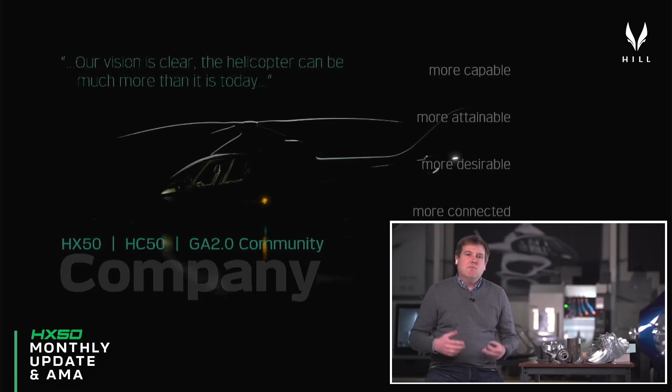So without further ado, let's talk a little bit about the company. For those joining this evening for the first time, Hill Helicopters is all about the idea that the helicopter can be much more than it currently is today - more capable, more attainable, more desirable, more connected, and more owner-centric. We're creating a whole community, a whole ecosystem for owners, users, and operators to own and operate and share the joy of owning a helicopter better than ever before.

To that end, it should be no surprise that what we're doing is connecting very well with the user base, and we're now up to 484 combined sales, with 399 HX50s and 85 HC50s going out around the world. We're absolutely delighted with the warm receipt we've received from the market for both products. We're very, very grateful for that and the support that we're getting.

To service this growing demand for aircraft and to really push the development forward and bring the aircraft to market on schedule, as you can imagine, we're having to grow the team and grow the facilities very quickly to keep up with all of this.

So I announced, I think last month, that we'd been advertising for 8 posts. We've now essentially filled all of those. We've got 3 new engine specialists starting with us: a performance modelling specialist, a jet engines or gas turbine engine stress specialist, and an aerothermal specialist, along with a new machining specialist that focuses on blade and blisk components.

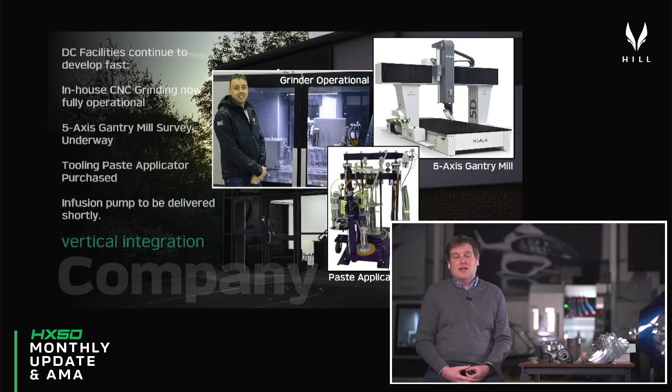The first half of the acoustic trials have now been completed, and we're just waiting for the last of this crazy weather we've been having in the UK to clear, so we can do the flying part and do the source surveys for the helicopter noise. So we'll have an update on that very shortly for you, but very pleased with how the facilities are keeping pace with the needs of the program.

So if we talk now briefly about the drivetrain, let's start with the engine this week. Essentially, we're now very, very close to a total design freeze on the engine. So what you will be aware of is we've, over the course of the last 3 to 4 months, switched to a much smaller, lighter, easier to build and easier to maintain version of the GT50 engine that features this compact diffuser and an annular combustor.

The design of that is now nicely mature, and with the exception of the last couple of parts, we're essentially ready to launch a full-scale stress and lifing and optimization effort on that to allow those components to be released for formal prototype manufacture on the equipment that you can see right behind me. The performance, the weight, and the cost of the GT50 are absolutely bang on target. So we're absolutely delighted with how the team have progressed that for us.

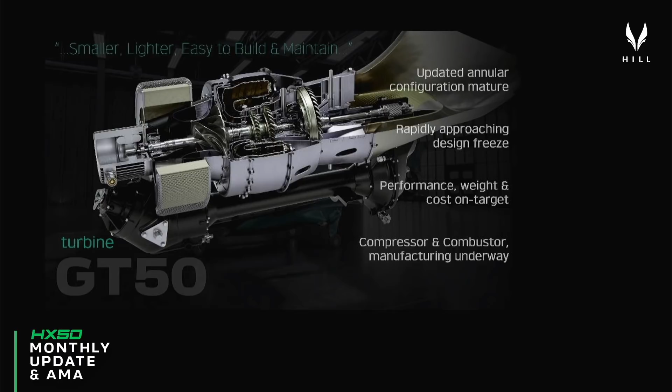The compressor and the combustor manufacturing trials are already underway. So as we've showed you on a number of occasions, we've completed the first manufacturing trials on the centrifugal compressor. This is the 10-bladed version that we did. We're currently developing an updated version with its Curvic couplings and a reduced 9-blade, 9-splitter vane form factor. That's going to be cut in the next couple of weeks on the 5-axis right behind me. And we've also got the titanium on order to be able to produce the titanium version.

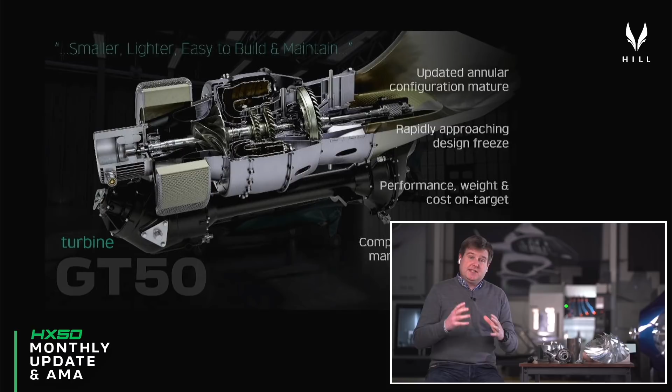I've got what's it in my ear? Sorry, just bear with me 1 second. I've got massive feedback in my ear.

So we'll also be producing the titanium version of the compressor very shortly as well, and that will then release that part of the engine to testing. So very, very pleased with how that's all coming along.

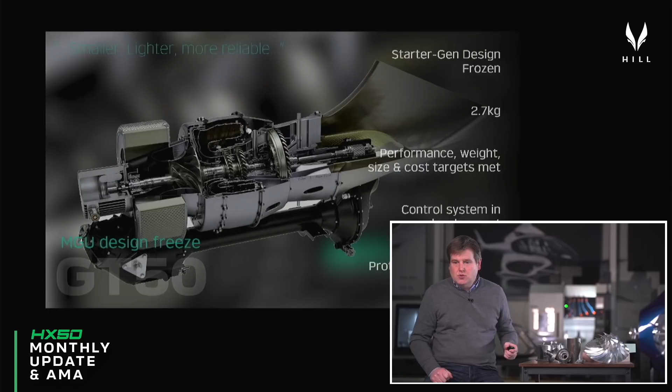Yesterday, we actually managed to freeze the design of the starter generator. So the starter generator on the GT50 engine is a directly driven, fully integrated system. And the reason that we've done that is to get a far more compact and a far lighter, simpler and more reliable starter generator configuration. We've now frozen the design for that. We are well below our weight target, so the whole starter generator unit has been designed for just 2.7 kilos, which is about half of what a typical one of these units for an engine of this size would weigh.

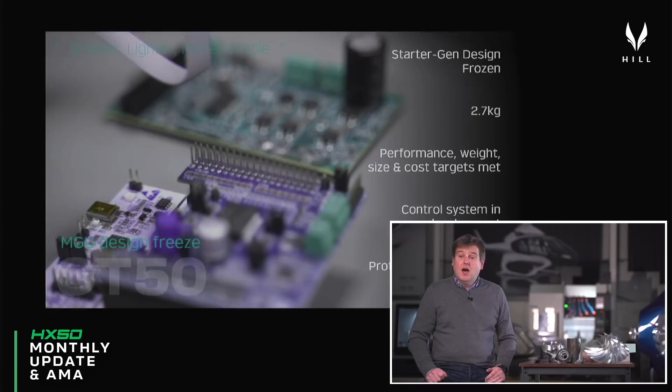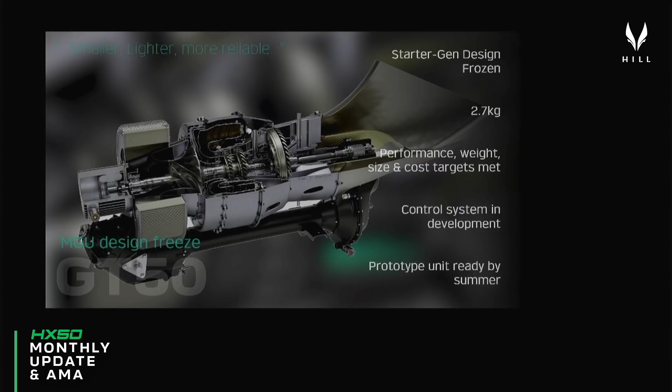Again, the performance, the weight, the size, the cost targets have all been met, so we're right on target for being able to deliver that exactly where we expected it to be. The starter motor really consists of 2 parts. We've got the hardware, which is the electromechanical device that generates the power, but there's also then the control system, which for a small high-speed device like this is a bit more complicated.

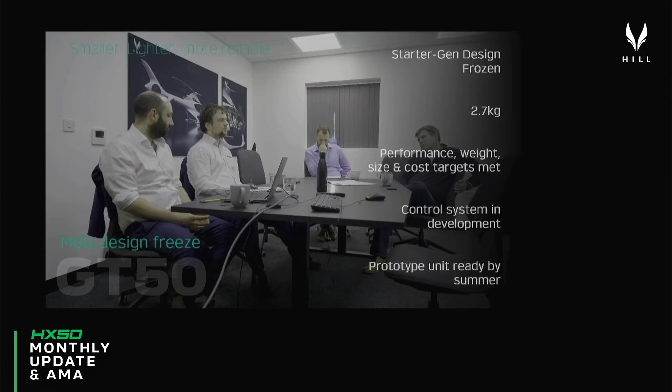We're currently looking at 2 alternatives for the control systems for the starter generator. The first one is something that we're developing in-house using a derivative of some motor control technology, and the other one is some off-the-shelf components that we're working with a third-party organization to develop. So all of that's coming along very nicely. The performance looks great, the price looks great, so really happy with how the starter generator's coming together for us.

So in terms of the overall engine program, what we've got to look at now is how we move from this nice mature design through to producing a prototype engine in the fastest time absolutely possible. And to do that, we've got essentially 3 major streams to the development program that are occurring all at the same time.

So while the aerothermal optimization and the detailed stress analysis that, to all intents and purposes, will only make very, very minor modifications to the geometry are taking place, we're busy producing all of the processes that we need to produce these parts on the machines behind me. So that includes the demonstration work that we've been doing on the compressor that I've already shown you. It shows the demonstration work on things like the speed reduction gearbox casing, the bearing work, the high-speed gears, and the nozzle guide vanes, and all of those things that we've introduced.

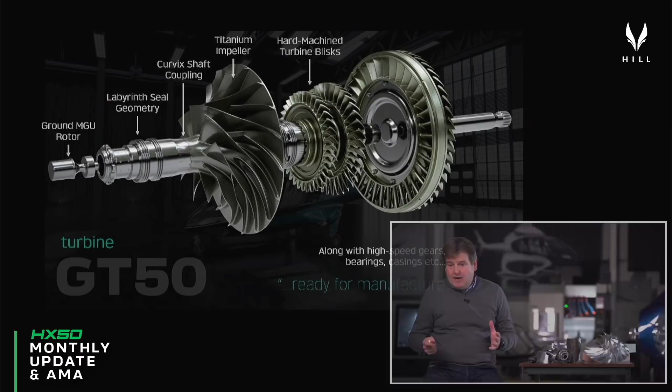So if we look at some of the work that we're doing at the moment, this is essentially the rotating assembly from within the engine. The first three components are the gas generator rotor, so the impeller from the compressor, and then the two-stage gas generator turbine. All of these components, the work to develop manufacturing processes for these, is going on right now on the machines behind me.

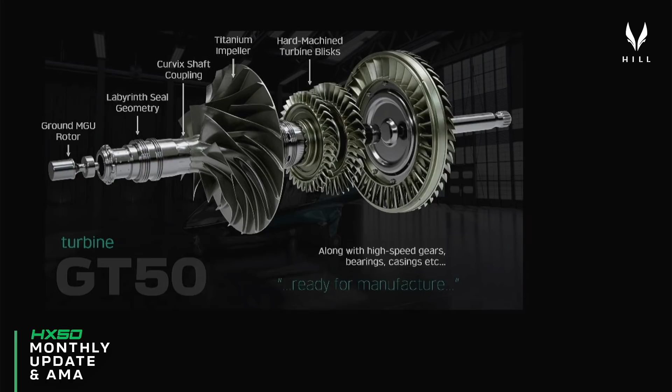So along that first shaft, you can see the ground assembly that we need for the motor generator unit. You can see the labyrinth seal blades. You can see the compressor's impeller. You can see all of the secondary air system passages and the through shaft lubrication holes. You can see the machined blisks that we'll be producing for the first version of the engine that runs on the test bench. And then you can see the power turbine assembly, which again will be predominantly machined parts for the first running engine. So all of that stuff is ongoing right now to get us to first run as fast as we can.

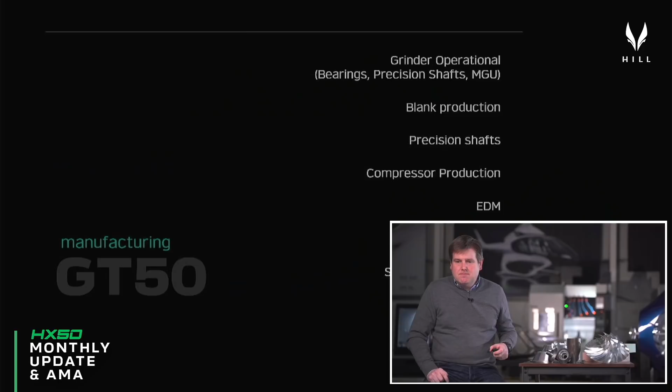Now, along with that, as we've talked about before, we've got all of the high-speed gear work going on, we've got the bearing work going on, the spring bar work going on, and all of the casings to support these components that's going on right now. So very pleased with how all of that's marching together. So again, just a summary of where we are with all of that.

With the grinder now operational, Mark has this week been looking at the early stages of hitting those super tight tolerances that we need for aerospace grade bearings. So looking at holding single figure microns for all of the key dimensions to make sure the engine's smooth running, stable, and has the life that it requires.

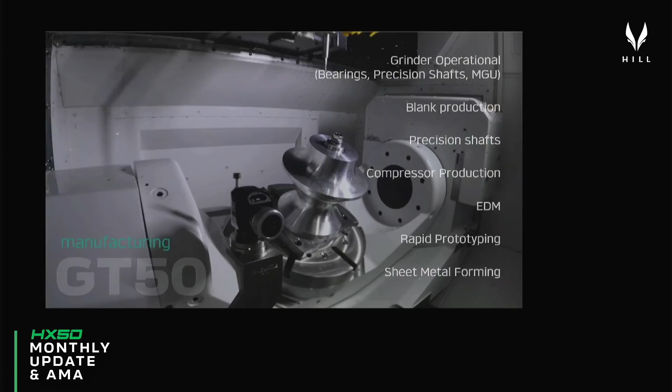We've been turning blanks for a lot of these components on the lathe. So the lathe is now operational, ready to go. You've seen us produce the mast. The very next thing that we'll be doing is producing the titanium compressor blanks, and then onto the shaft blanks and the blisk blanks, ready to go on the 3 and 5 axis machines. All of the precision shaft stuff is now essentially ready to go in terms of manufacturing process development, as is the compressor production. Now, we talked previously about these nozzle guide vanes, which are amongst the most difficult components to make in the entire engine.

Now, we've been working with a supplier to procure an EDM machine that is required to create the sealing slots and the cavities that are required to eject the cooling air out of the back of the blade. And I'm pleased to say that that's all going very well as well. So we've secured short-term access to one of these machines to be able to make the prototype parts, and the procurement cycle for that is ongoing. Another area of interest that we've been pursuing very actively over the course of the last month is where we can make greater use of rapid prototyping.

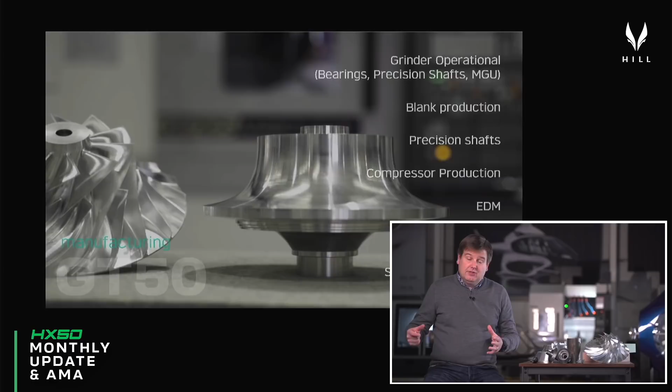Now, with things like our castings, the blisk castings, the nozzle guide vane castings, and the engine outer castings, these are all investment cast components which require wax patterns to be produced, a ceramic slurry shell to be formed, and then that wax is burnt off and you pour the material into the shell mold.

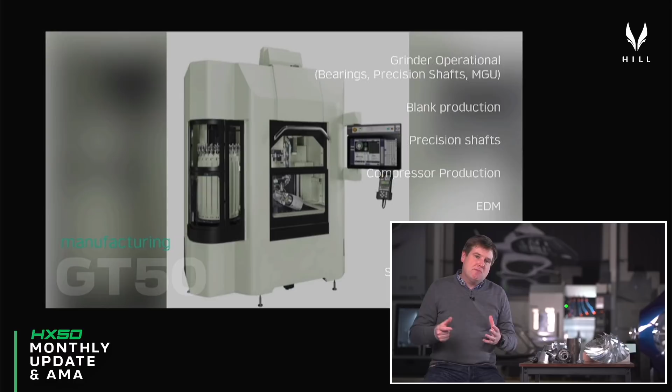In terms of some of the components, in the kind of volumes that we produce, it might actually be more efficient to rapid prototype in a polymeric material the patterns for these moldings, and that's something that we're actively pursuing with a number of rapid prototype companies at the moment.

So we're looking at rapid prototyping the patterns for some of the key castings to expedite the production of those parts, and we're even exploring rapid prototyping some of the blisk components as well to expedite the surge towards production for all of this.

The final area of development that we're looking at is the sheet metal forming. All of that work has now been ongoing for about 6 weeks, and we've got to the point where we've now commissioned an expansion machine which essentially allows us to hold the concentricity of the sheet metal rings that are required to form the annular combustor.

We're also well along the way now with the press tools for the exhaust and also the end caps and the transition duct for the combustor itself. So pleased on all fronts with how that's going, and we're very much on schedule to get those components produced in time for the first engine run.

If we now move on to the broader transmission for the aircraft, there's a similar effort going on for the whole transmission system for the aircraft. So we're very much moving the final stages of design in parallel with manufacturing processes.

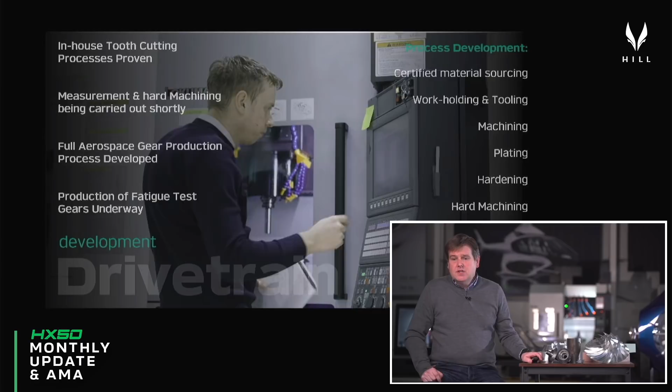So if we have a look at the work that's been going on in detail to march us towards production for the manufacture of the transmission, then we've now essentially completed the manufacture of the first in-house gears. So we've carried out the tooth cutting. We've now manufactured 2 different sets of gears for the tail rotor gearbox, which I shall show you shortly.

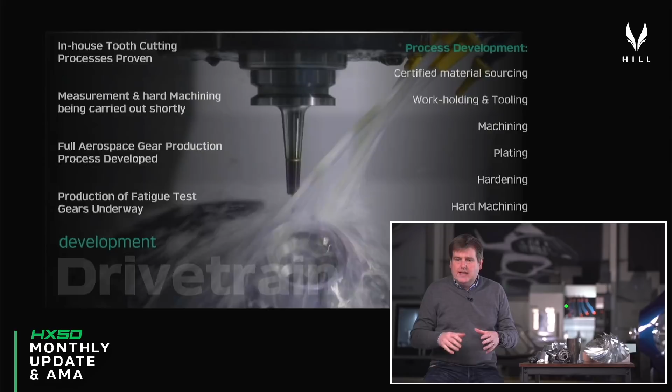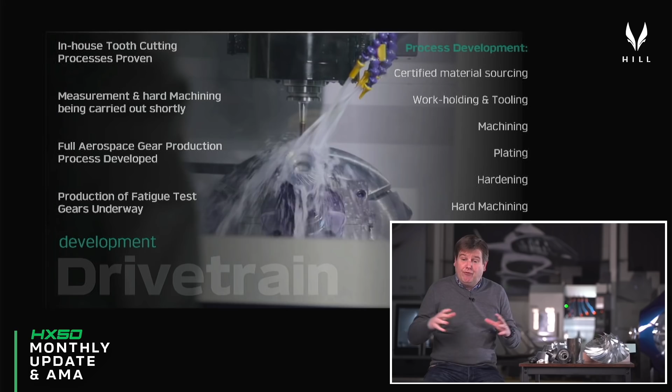The measurement of the hard machining for those 2 gears is going to be carried out in the next week or 2. And we've also now secured the full aerospace gear production process for every element of the process that we need to make these gears.

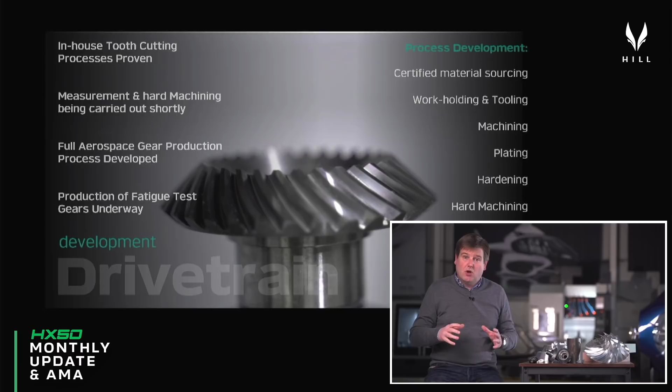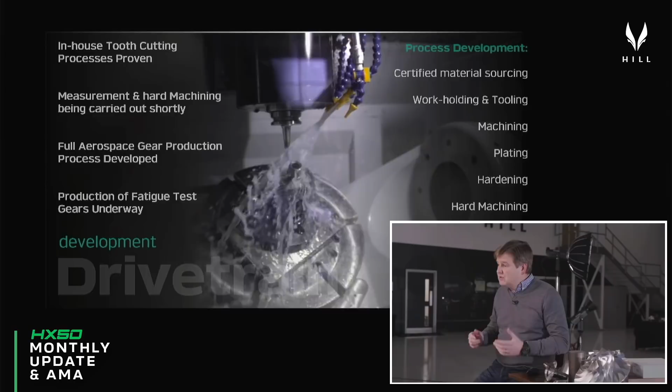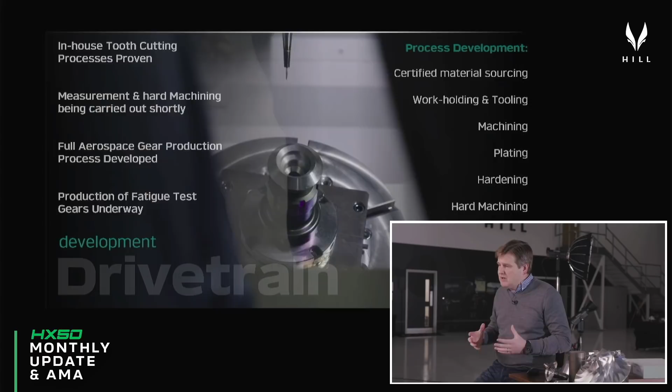Now, it's not just about CNC machining tooth profiles to the right tolerances. There's much more that goes into producing aerospace grade gears. First of all, we have to be able to secure certified high integrity alloy steel to make the gears out of. We need to sort out the work holding and the tooling to be able to hold the super tight tolerances that are necessary for these components. We then need to be able to optimize our machining strategies so that we can productively generate these gears on the infrastructure that we've got here.

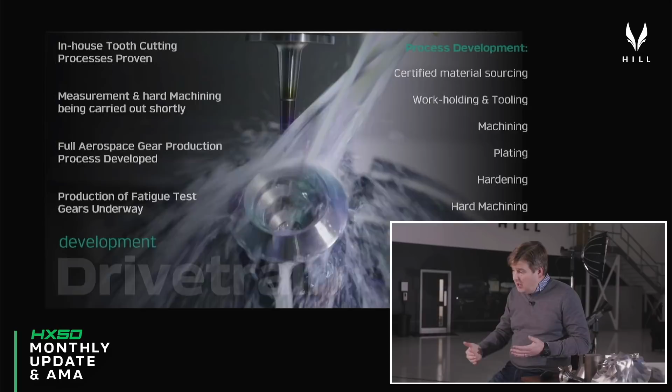There's then a whole process of plating to protect areas that we don't want to harden. And then there's the hardening process itself, the hard machining, shot peening to get the fatigue properties we need on the surface of the teeth, and then the NDT and inspection processes.

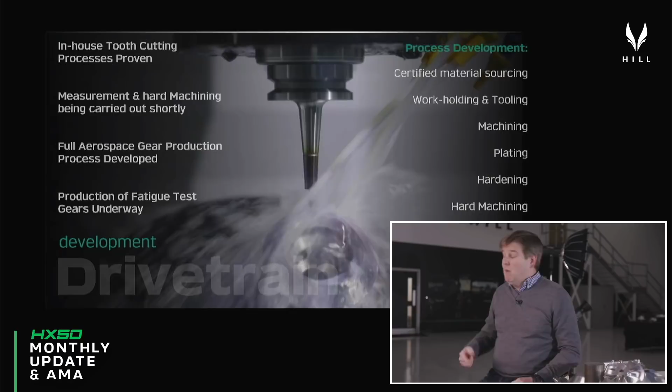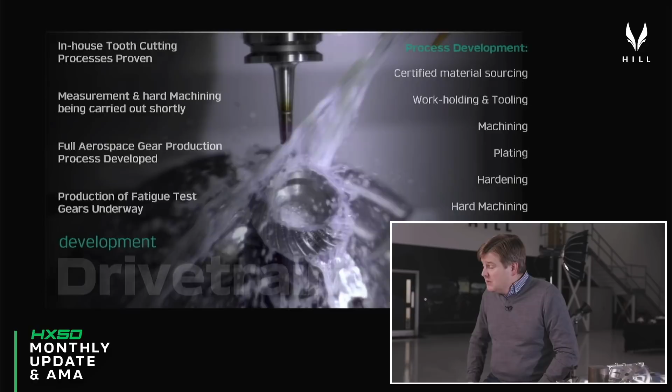That entire supply chain is now in place to support those gears, and we are in fact producing the test gears for the fatigue test articles, and then we will march through the rest of the gears for the entire platform. So very, very pleased with how all that's going, and we're again keeping very much to schedule with the delivery of that first gearbox.

So if we just talk about the tail rotor gears for a second, I introduced in the Christmas update that we'd essentially almost completed the design for the gears in the tail rotor gearbox. I showed you last month that we completed the blank cutting, and over the course of the last month we've now completed all of the process development and optimization for the tail rotor gears for both the driving gear and the receiving gear that picks up the drive shaft from the main rotor.

So these gears are currently in the roughed state, which means they carry about a quarter millimeter of excess material on each tooth, ready to be plated, hardened, and then hard machined to the finished geometry that will sit in the gearbox.

So we're very pleased with how this has gone. The process is pretty much where we want it to be in terms of cycle times, and these are off to be measured so we can optimize the cutting strategy and get the tolerances right over the course of the next week or so. Those are the actual gears that sit in the center of the tail rotor and drive it. Very pleased with how all of that's going.

In parallel with this, helicopters are full not only of gears but also of bearings, and the fact that the grinder is now fully operational means Mark is busy developing all of the processes needed to produce a wide variety of bearings across the aircraft. That includes the high speed stuff in the engine and the high load stuff in the top end of the main rotor gearbox.

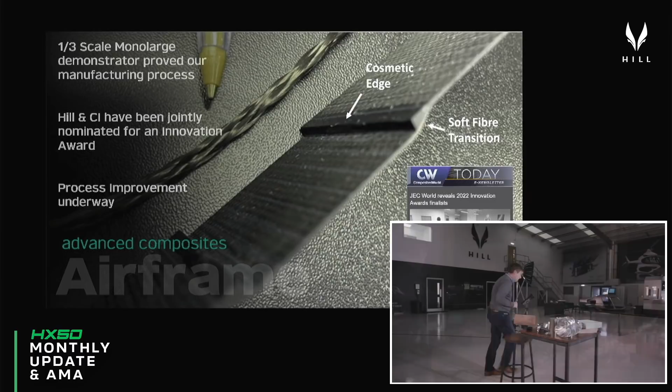So if you come over here, this was the very first third scale fuselage we took out of the mold. One of the things that's very important to HX50's aerodynamic performance is flush fitting windows and doors, and to deliver that we need to create neat recesses with crisp edges so that we can close the panels and have nice tight shut lines. What you can see here is that we've got quite blunt shut lines without a crisp finish, and that's because essentially we laid the fabric straight down into the mold without creating any real preparation to form this sharp edge.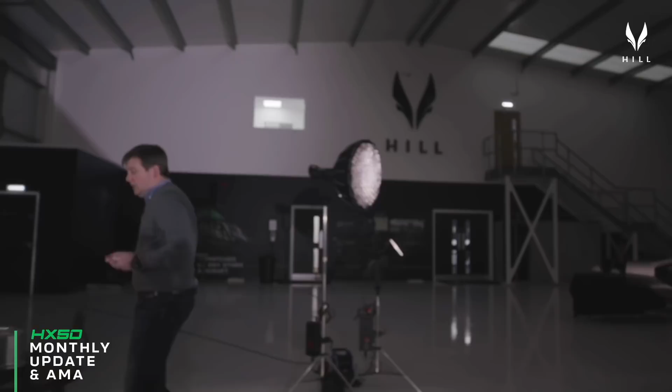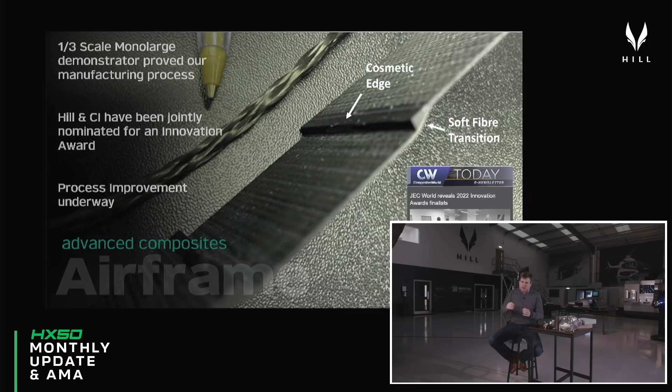Now one of the techniques you can use, if we refer back to the slide, is what we call a carbon fiber bootlace. What you can see on the slide is that we use carbon fiber material and pack it into these tight corners to provide a non-structural carbon fiber filler, allowing us to create a sharp edge to fit the doors and windows and give an automotive quality finish to the exterior of the fuselage, while creating a smooth path to keep the structurally important fibers nice and straight.

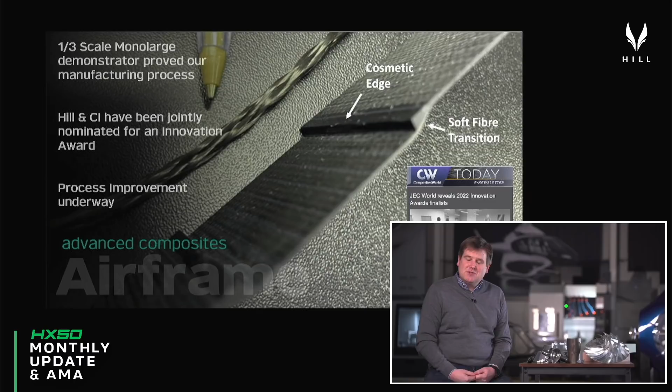In addition to that, we've also recently been informed that we've been nominated for an award by the JEC Composites Association, jointly again with Composites Integration, for the work we've done developing an infused aerostructure as complex as the monolarge. That was some very welcome news a little while ago.

The other big area that's a challenge for the aerostructure is the lightning strike mesh protection that we have to get into the fuselage. Again, working with CI, we've been finding some very intelligent ways to hold this mesh, because this mesh is like a copper net.

It really doesn't want to lay down, it doesn't want to stay where you put it. So there's some challenges in terms of getting that to lay down in the areas where we need it. The guys down at CI are busy developing those processes at the moment so that we can produce this

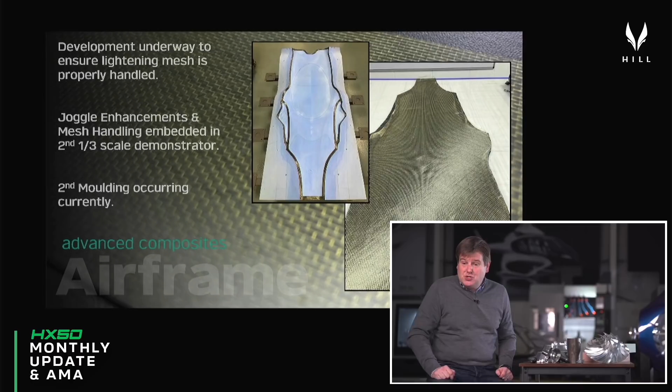really high quality fuselage when we get to full scale. So the guys are currently building a second third scale monolarge, which includes not only the joggles and the carbon fiber bootlaces, but also the lightning strike protection mesh in a production ready example of the fuselage. So we're ready then to go to full scale tooling.

So if we talk about now the very next step for the production of the fuselage, which is again a two-phase program where we march the final structural optimization, the development of the plybook forwards as we release the A-surface tooling to again minimize the lead time to be able to produce this thing.

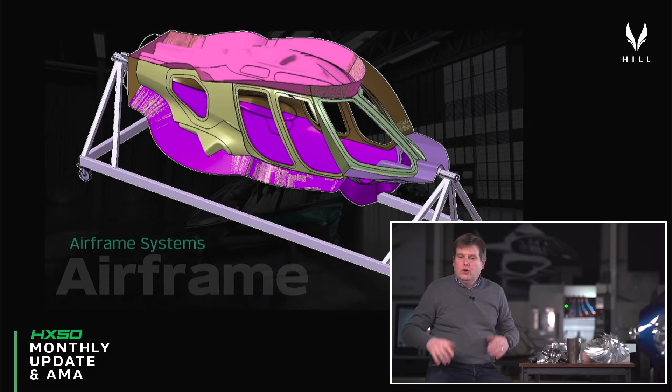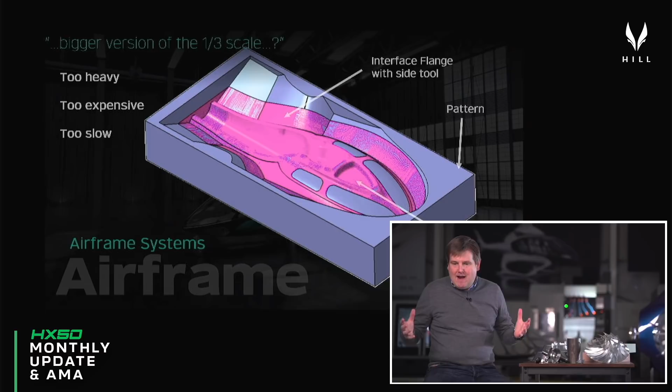Now, when we produced the third scale model, this was essentially relatively crude tooling that was produced straight out of model board. Now, if you remember the tooling strategy that we've got for how you produce this thing at full scale, we've got a very large rollover rig that's about 6 meters long, and then this 5 or 6 piece tool that allows you to address all of the areas and lay all of the fabric down and get those bagged up. Now, the problem is if you try and do that at full scale, then the direct model board approach for making the pattern simply becomes too heavy, too expensive, and too slow.

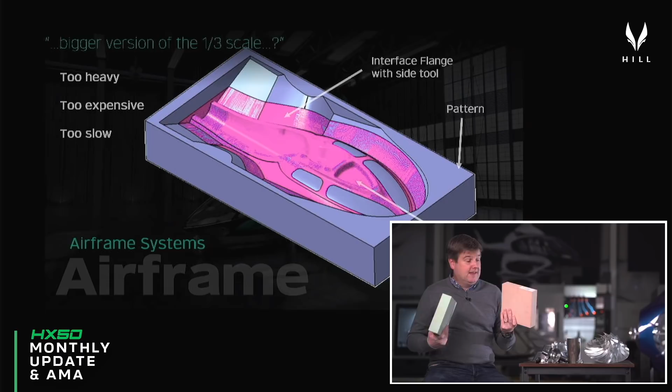I think we worked out when you start looking at either these epoxy tooling boards or the polyurethane tooling boards, I think we end up with about 17 tons of this stuff to be able to just make the patterns, and a very large bill for materials.

So one of the things that we've been looking at is how we can bring knowledge from across industries to be able to do this in a more practical and a more cost-effective way. So other industries make composite components that are much, much bigger than aircraft. And so what we're doing is we're pulling some of the technologies from boat building and wind turbine blades into how we make the patterns that we then take the tools off for our larger composite parts.

For small things like doors and cowls, then model board patterns are fine. For things like rotor blades, then you'd obviously go to metal patterns, metal tools and carbon tooling. But what we've got here is a way to make very large scale tools very cost effectively.

And once the stuff's delivered, nice thin layer, so you only use the minimum amount of it that you need, that goes off, and then that can be CNC machined to the same finish and the same tolerances that we can achieve with direct model board tooling. So that allows us to make these big tools much faster and much more cost effectively than would have been traditionally possible.

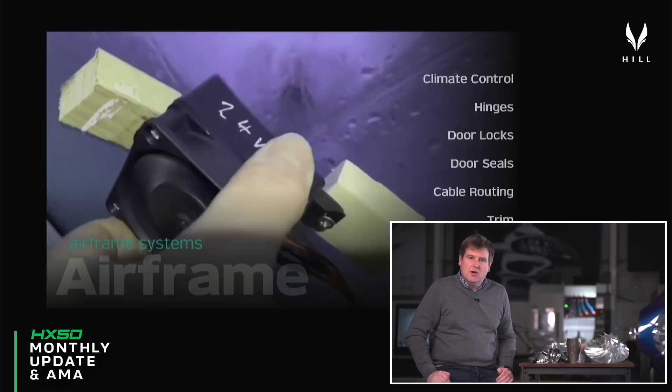On top of that, Martin's been busy looking at all of the necessary detail to fit the seals, to provide weather seals, wind seals, and everything else we need to fit those doors securely, so that people living in colder parts of the world are kept nice and warm, and here in the UK we're kept nice and dry. And then finally, all of the things to package the trim and the avionics and electronics have been ongoing as well, to allow us to finalize those aspects of the design.

So we're all very familiar now with our rather Gucci, automotive-esque interior for the aircraft. I've reported in previous months how we've spent significant time optimizing the ergonomics, making sure the 5th and 95th percentile are properly accommodated, making sure the view angles work properly, optimizing the user experience, and detailing all of the functional requirements of the seats to make that work.

But of course, there's much more to an aircraft interior than just that. One of the primary areas we have to be very careful about is crashworthiness, and there's a lot of work being done on the carbon fiber seats. In particular, recently, we've been looking at the energy absorption mechanisms required to keep the loads in your spine below a certain level, to make sure that in the event of a vertical impact, you're able to get up and walk away. That's something that's been going on over the course of the last week or so.

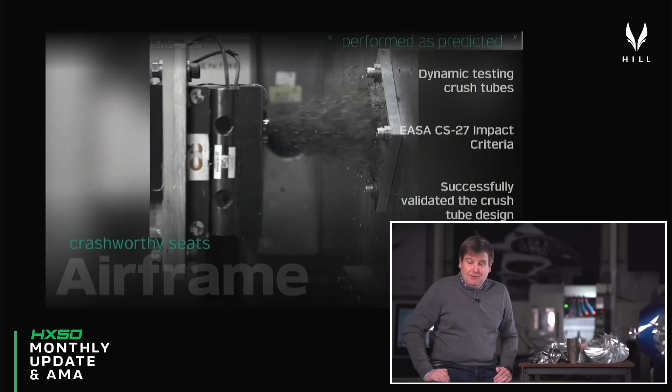So we showed you last month the quasi-static tests that we were doing to look at the force displacement history. We've now done the dynamic testing on the crush tubes to demonstrate that we can maintain the levels of energy absorption and the force displacement characteristic that we need during a rapid impact.

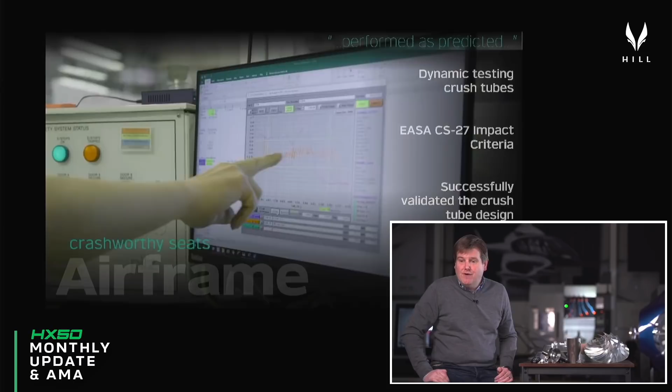Now, these tests have been conducted to the EASA CS27 impact criteria. It's the same for the FAR Part 27 criteria, and we've essentially successfully now validated the crush tube. So we have a carbon fiber crush tube that meets the crashworthiness requirements we need, that now gives us the confidence to move forward and put that into a full-scale crashworthy seat.

We've tested both a single tube and a dual tube design. I'm only showing you the single tube design here. And the single tube design looks to be a more practical option for us. There's all sorts of intricate modes that you've got to manage with the two tube design.

Just for interest, what you can see here is when the impact occurs, the carbon tube is pulverized, and it's that pulverization that absorbs all the energy. So it's all that surface area that you create that absorbs the energy that protects your spine in the event of that crash.

So we're very pleased now to be in that position, to be able to move the seats forward to a point where we can drive those to completion as well.

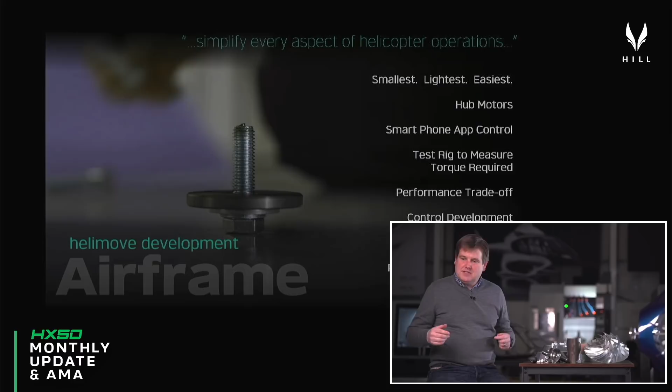Let's talk now about the HeliMove system. So the whole point of HX50 is we're trying to make the experience of going flying as simple, straightforward and enjoyable as possible. And that's not just about our user interface, that's not just about the airframe, it's about everything. So it's about from the moment you try and pull your aircraft out of the hangar to the moment you put it away.

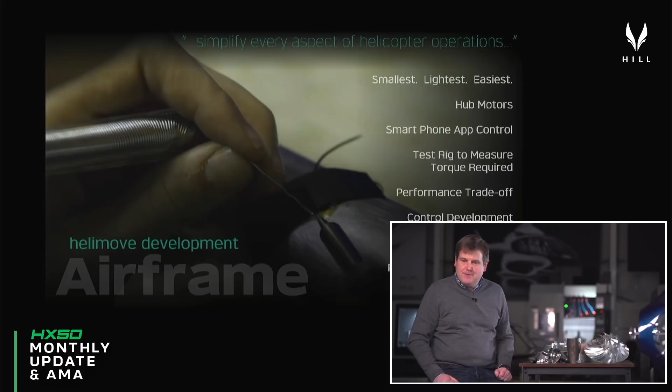To that end, we've been developing our HeliMove system, which is essentially a series of small motor drives in the wheel hubs that allow you to pull the aircraft in and out by a smartphone app. And essentially, to develop that system, what we need to do is work out what the smallest, lightest and simplest mechanical arrangement we can have is to deliver those outcomes.

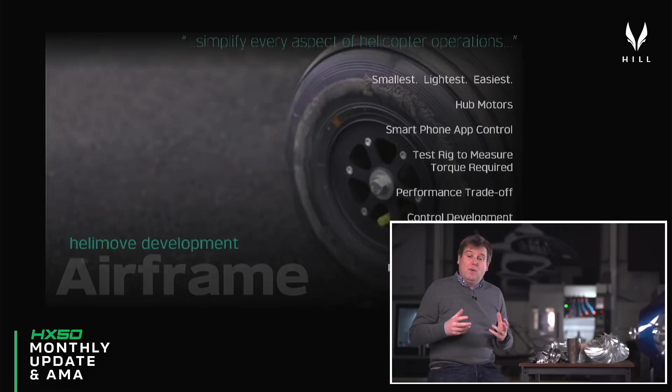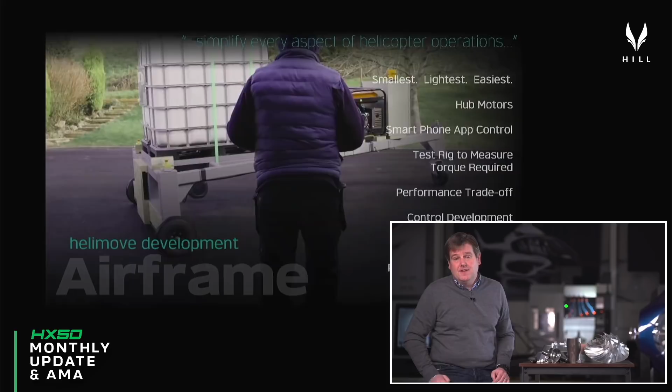And to do that, what we needed to do is physically run some tests on the actual wheels and wheel hubs. So we've built what we call the HeliMove rig. Over the course of the last couple of weeks, we've been able to get that out into the field and test the HeliMove rig, measuring using strain gauges and torque transducers the amount of torque required to do all of the sorts of things the HeliMove system will be required to do.

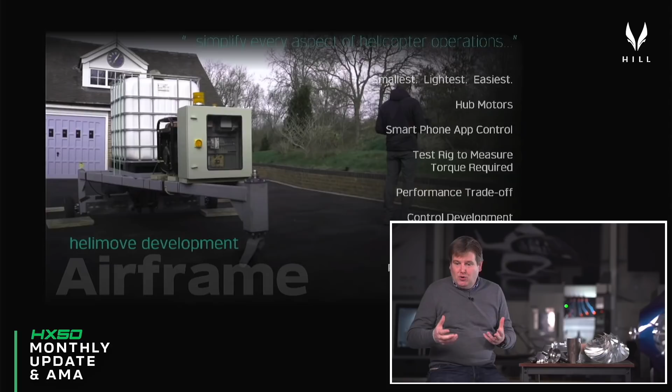So moving over smooth tarmac, spot turns, climbing over broken concrete, transitioning over soft ground, and dealing with all of those sorts of things. We've carried out those trials, gathered the data, and we're now very pleased to report that the data is very much where we expected it to be, and both the harmonic drives and the size of motors we were aiming to package within the hub are exactly where we need them to be. So we're now in a position to go ahead and finalize the design and packaging of the HeliMove system and get that ready for HX50.

So really pleased with how that's all moved on.

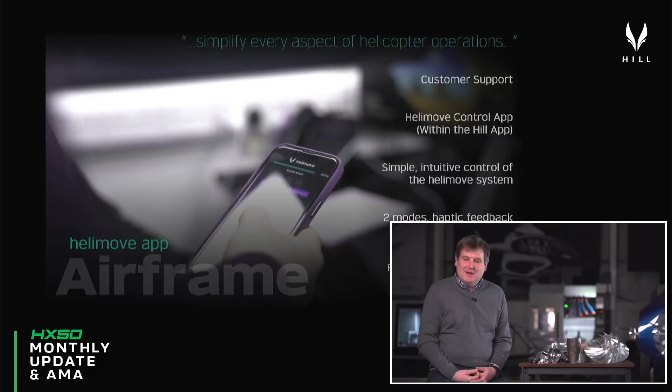As somewhat of a surprise, we had a request from a gentleman called Rowan Wilson, who's the founder of OzRunways. Rowan's a very experienced and successful app developer and also an HX50 customer. In order to escape some of the COVID restrictions in Australia, he decided to bring his family for a holiday here in the UK, and while he was here, he decided to come and do a few days' work for us.

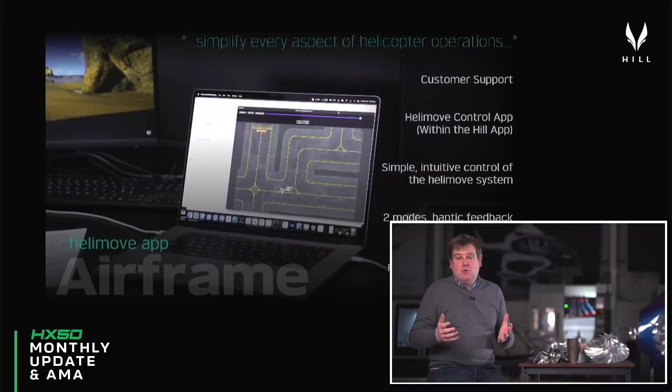Rowan's been busy developing the HeliMove app part of the Hill app, which now allows us to essentially control the HeliMove system we just demonstrated on the rig via a smartphone app. The app provides a very simple user interface where you can command the movement with a single finger or by directly controlling both of the wheels.

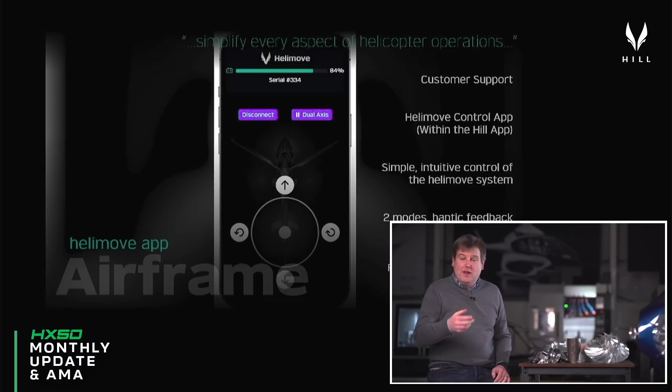It gives you haptic feedback so that you can tell when you're in positive control of the aircraft. Rowan went and built a little simulator so that we could test the usability of this. The thing's basically now sat there ready to be hooked up to the rig for full-scale testing.

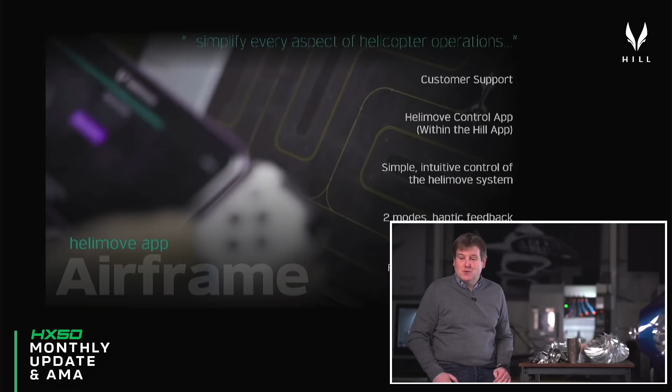In addition to this, Rowan's also been helping us with the app management of the flight data recorder stuff as well, so really delighted with how that's come along.

Finally, in terms of the digital cockpit, you'll be aware that we've been wrestling with the idea of a 2-screen and 3-screen solution. That was very much about whether we can physically host all of the apps people want to use for navigation on the third screen in the center of the cockpit.

We've now managed to start exploring this with ForeFlight, which was one of the areas that was the biggest concern for us. I'm pleased with how that's moving, and we should be able to report back to you very shortly as to whether we're going to be able to support not only the Android apps but also the Apple apps as well. So more news to come on that, but I'm pleased with how it's going at this point.

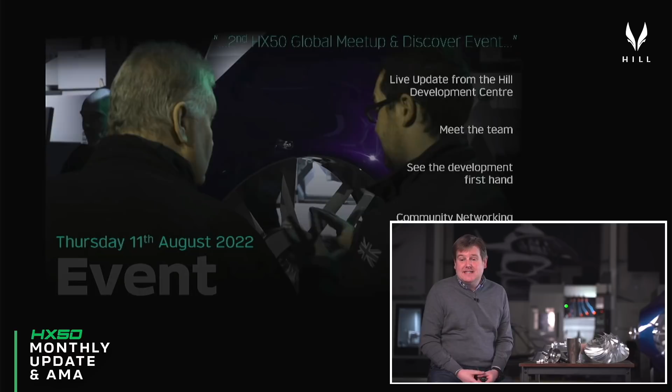The final point is we've now set a date for the next HX50 Global Meetup and Discover event. This is a live update coming from the Hill Development Centre. You get to meet the team as you did last time, see all the major developments firsthand, network with the community, and we'll be providing some lovely refreshments. I'm not going to say exactly what's going to be there, but we're planning something very big for you. We look forward very much to seeing as many of you as possible on Thursday, the 11th of August this year.

At that point, I'm going to call it a day and look forward to answering any of your questions. Thank you very much for your attention.